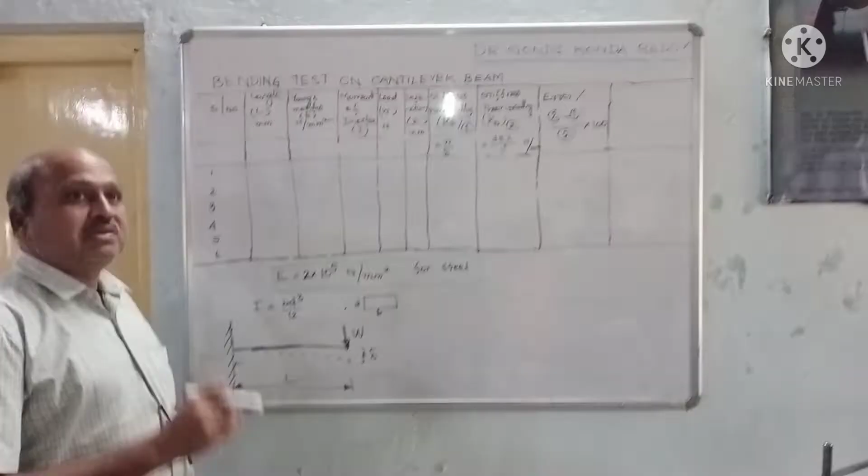Now we are moving to the calculation part, which I am going to explain on the board. I will explain the calculation part of this cantilever beam bending test.

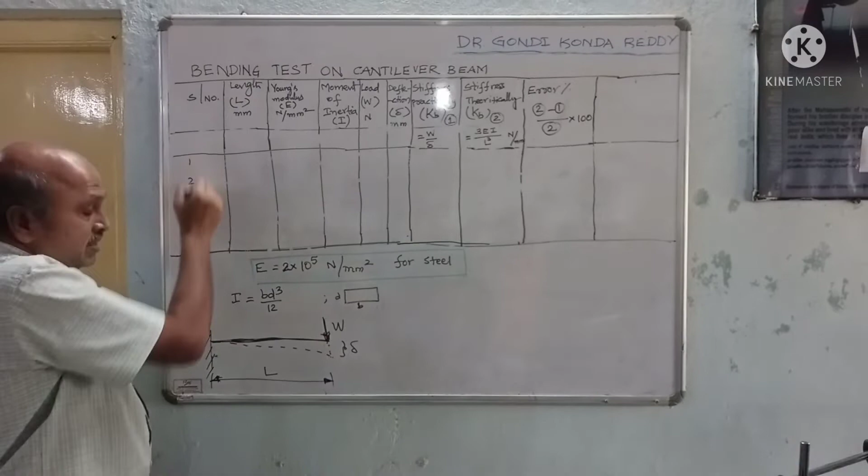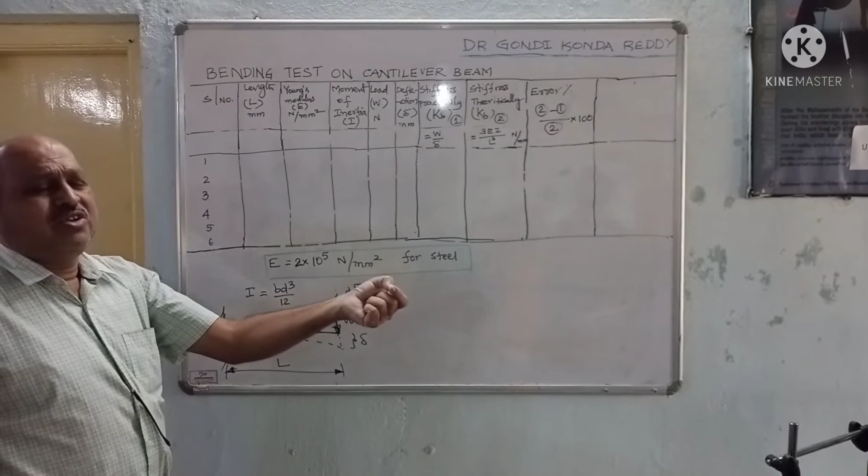These are the tabular columns we are going to follow. The first column is serial number, since we are taking 6 readings, so I am writing 6 serial numbers. Then the length of the beam - the length from the fixed end to the free end where we are applying the loads. You can vary this, or take a fixed value as given data, such as 1000 mm or otherwise 950 mm. Whatever value you take, use that value.

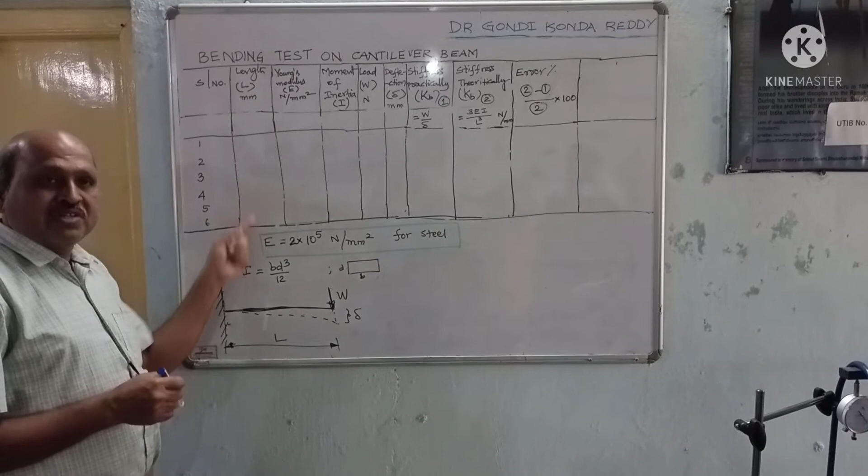It is not going to vary while the experiment is going on. Once it is started, you take all L value same for all the weights. Maybe it is 1000 mm, I am taking.

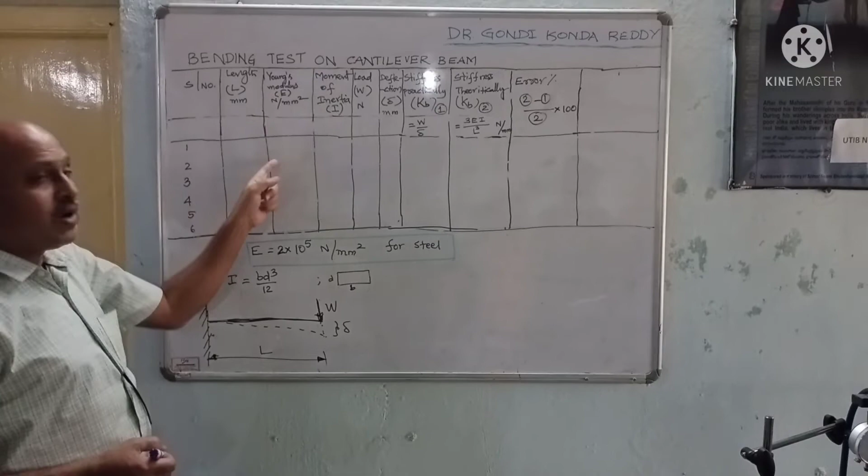Then Young's modulus, I am giving the steel material. The Young's modulus for steel is 2 into 10 to the power of 5 Newton per mm square. Take that value of Young's modulus. It is not going to change since we are using the same material.

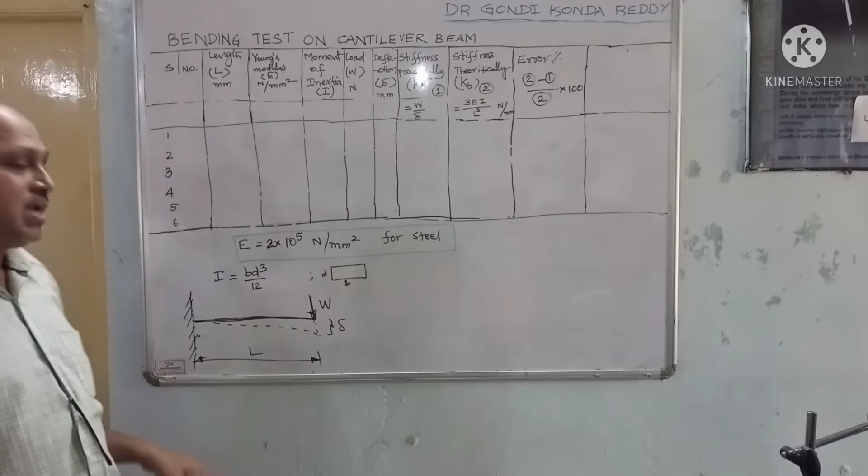Then moment of inertia I. You know it is a rectangular cross section as shown here, breadth is B, depth is D. What is the moment of inertia? We know it, I is equal to BD cube by 12. So B is in mm, D is in mm. What is the value we are getting in units? Mm to the power of 4.

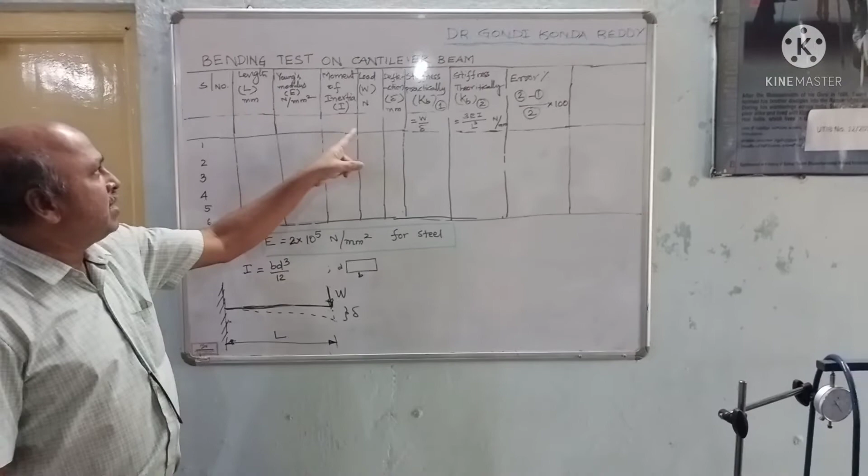So now we write the value of moment of inertia like this. You just measure through vernier caliper, take the values and have the moment of inertia in mm to the power of 4. Then load.

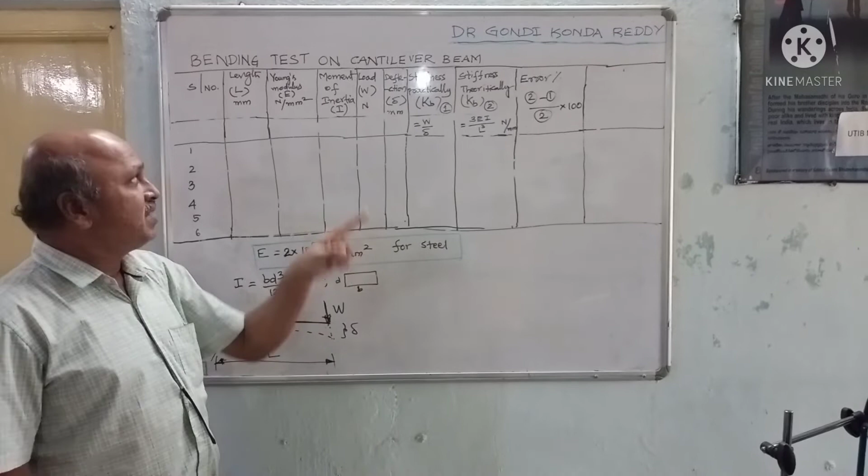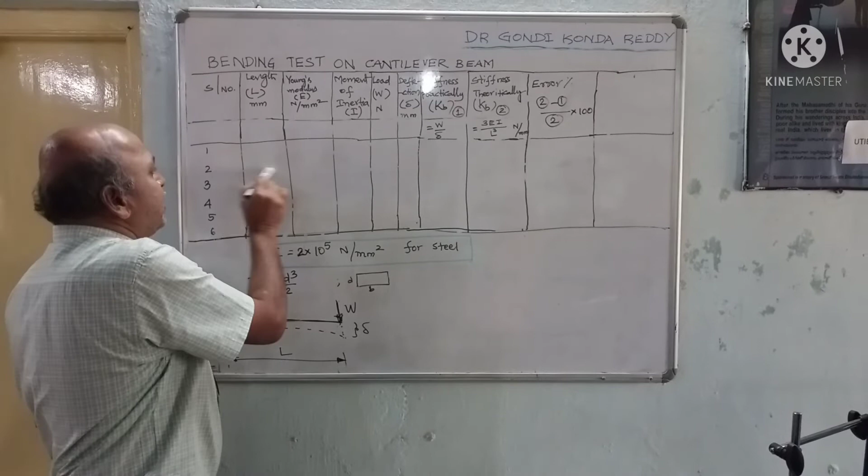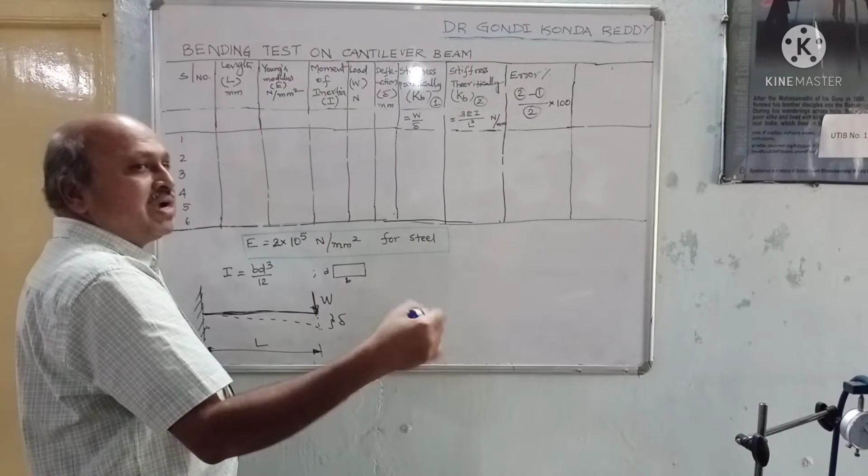Load, as I am saying, the first load you take is 0.75 kg. In terms of load, how much are we getting? 0.75 into 9.81. Second reading you take, add 0.5 kg, then 1.250 kg. In terms of load, multiply by 9.81. Because we are taking load in kg, multiply all the values in kg to newtons by multiplying with 9.81 everywhere. Then you take third reading.

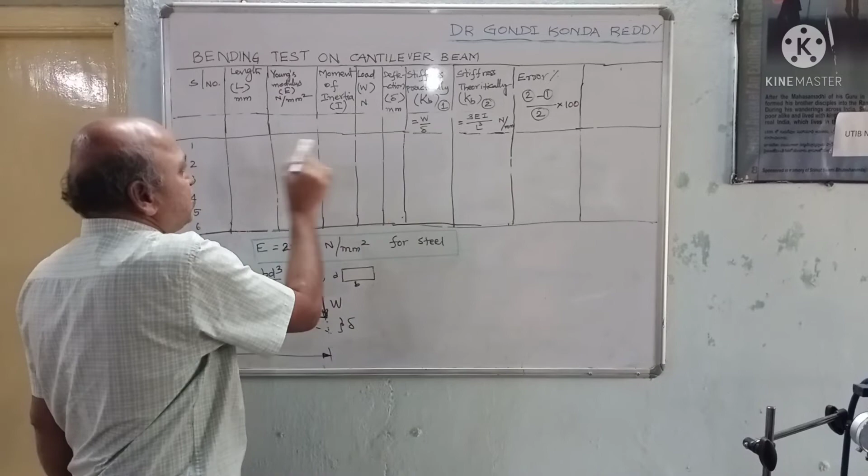For that, what is the deflection we are getting? You have to take it. First value, as we are taking, the weight we are taking is 0.75 kg. In terms of newtons, 0.750 into 9.81. That is in newtons. Then deflection, what is the value that we are getting? You write that.

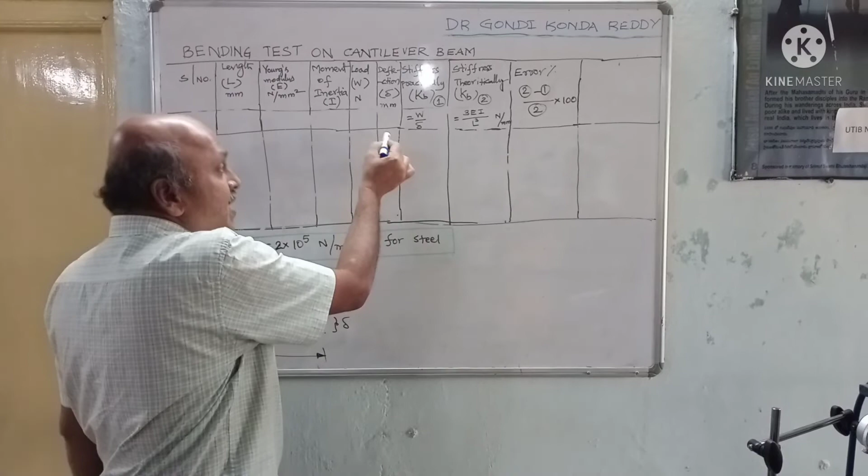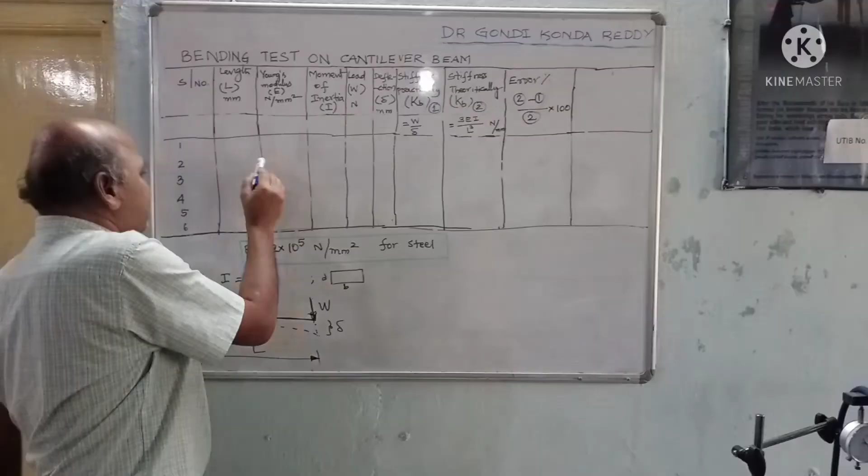Then you take the second value. What is the value? Weight load 1.250. In terms of newtons, 1.250 into 9.81. Likewise, go on adding 0.5 kg like that.

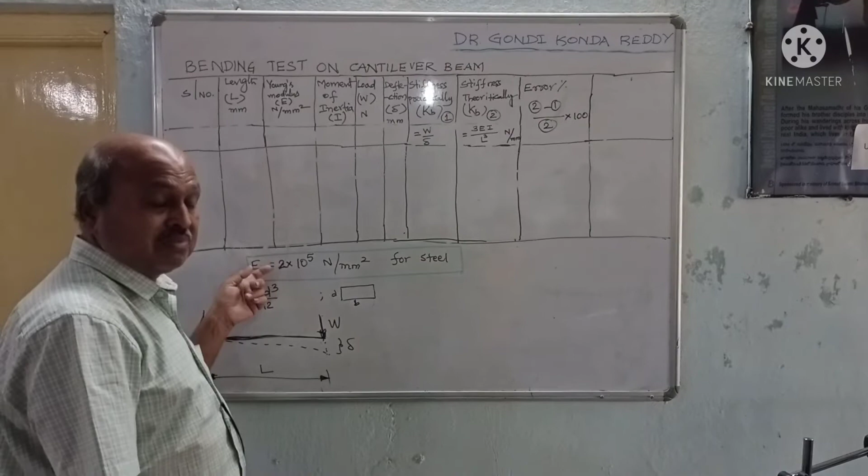Because it is simply a cantilever beam, we are going to have more deflections, so add only 0.5 kg. Don't go for maximum 2 kgs, 3 kgs like this, not 10 kgs. Maximum load is not 10 kgs, you take this to 2 to 3 kgs, 3 kgs is enough. So add every reading 0.5

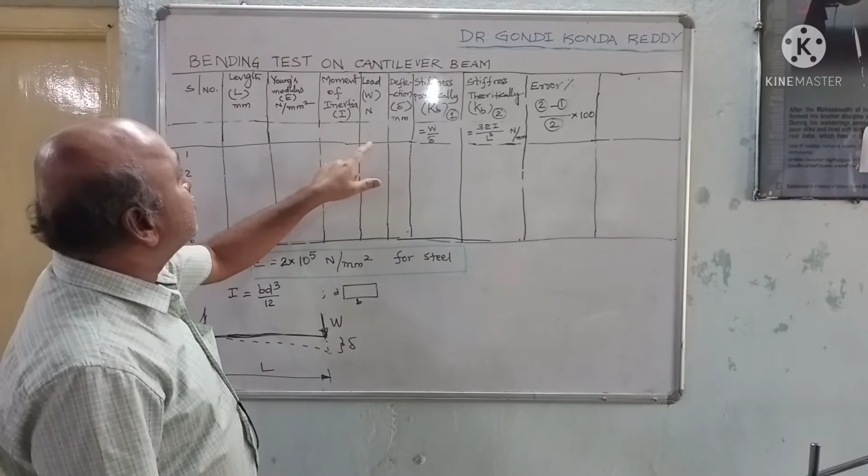kg like that. So for that individual reading, what is the deflection we are getting? You have it. Then stiffness practically.

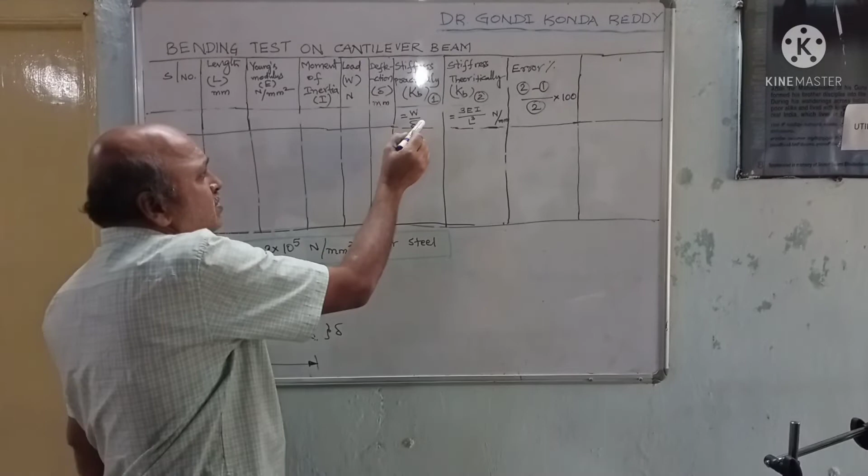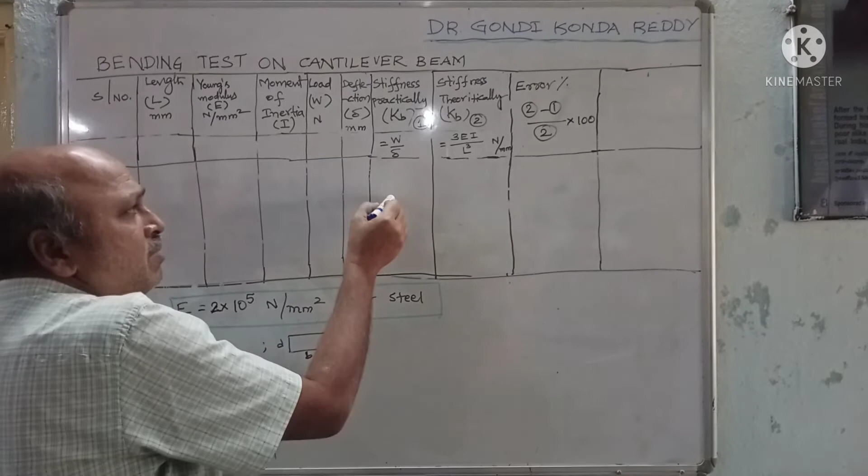We know stiffness practically is W by delta. W we are getting in newtons, delta deflection, whatever value we are getting, W by delta, you take it. W value we know in newtons and delta we know in mm. So the stiffness practically we are getting is newton per mm.

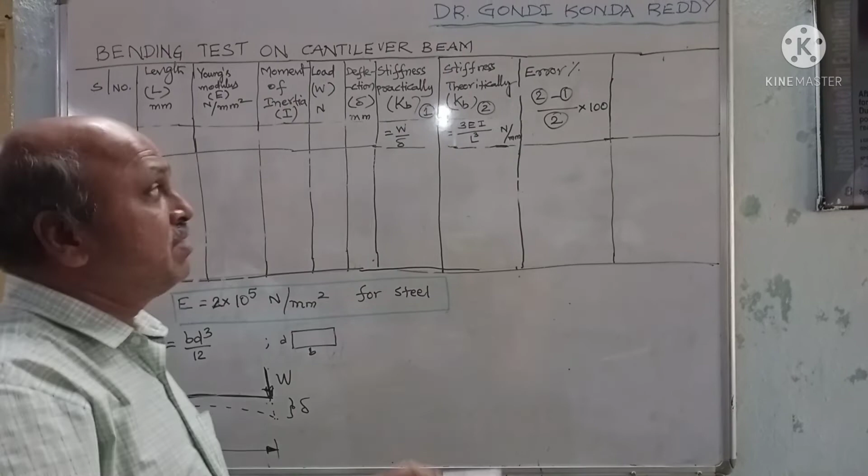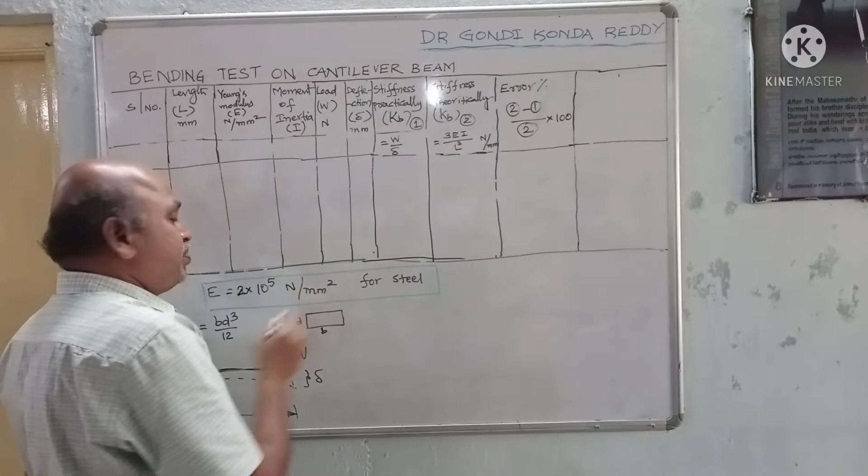So we know theoretically also. Theoretically, stiffness formula is 3EI by L cube for cantilever beam. E is Young's modulus, 2 into 10 to the power of 5 Newton per mm square. I is whatever value we are getting, take that value. By L cube, L is 1000 as I am asking you to take, so 1000 cube.

So this entire value we are getting in Newton per mm. Now we got the stiffness value in terms of Newton per mm, practically and theoretically also we are getting.

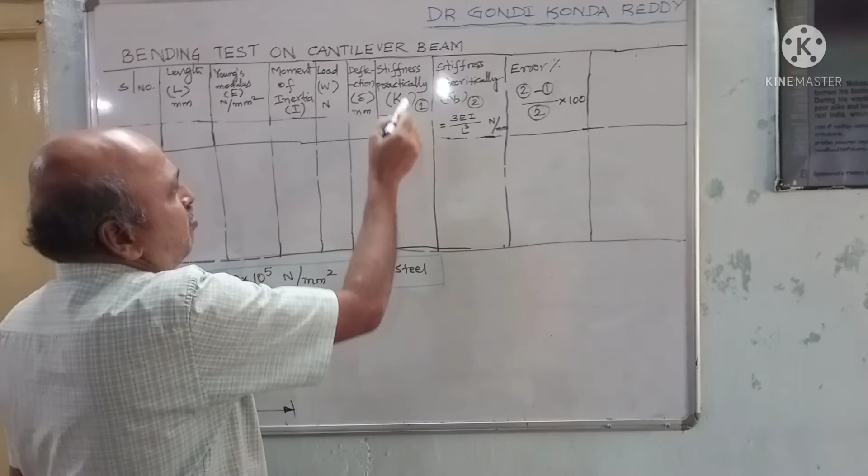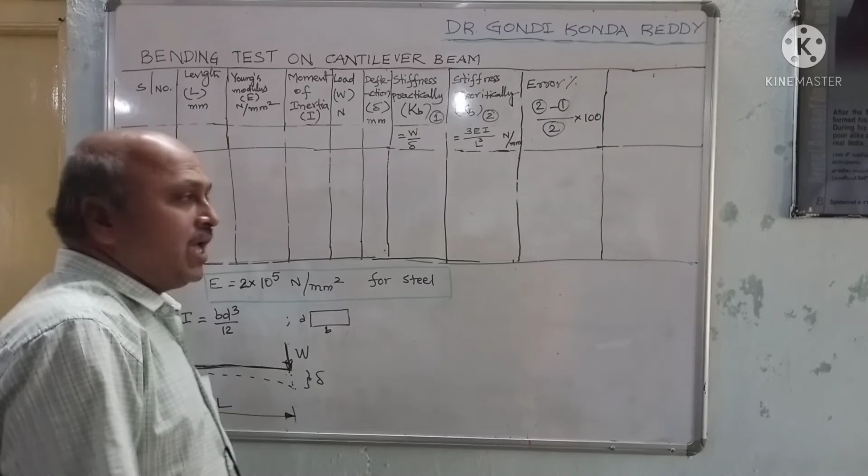Take the error percentage. How do we take it? Theoretical minus practical by theoretical into 100, I want in percentage. Likewise, you take for all 6 readings, then you are getting error percentage. Take the percentage, the average percentage of error, because we are having 6 readings, take the error of 6 reading percentages. So we are getting error percentage.

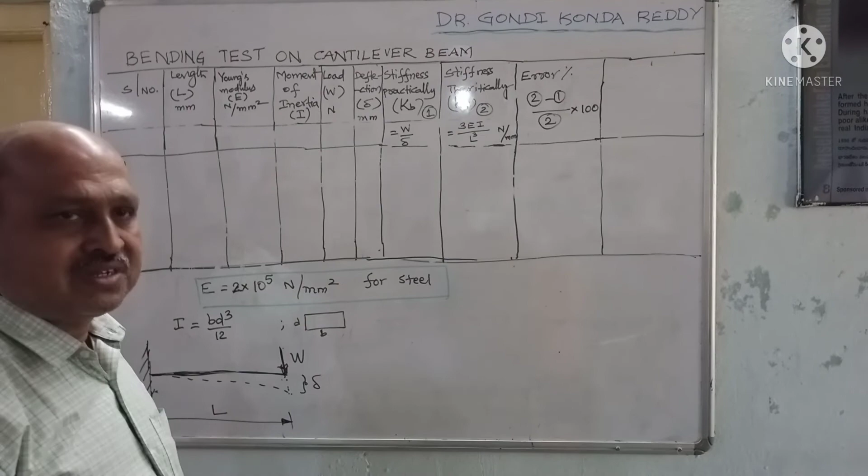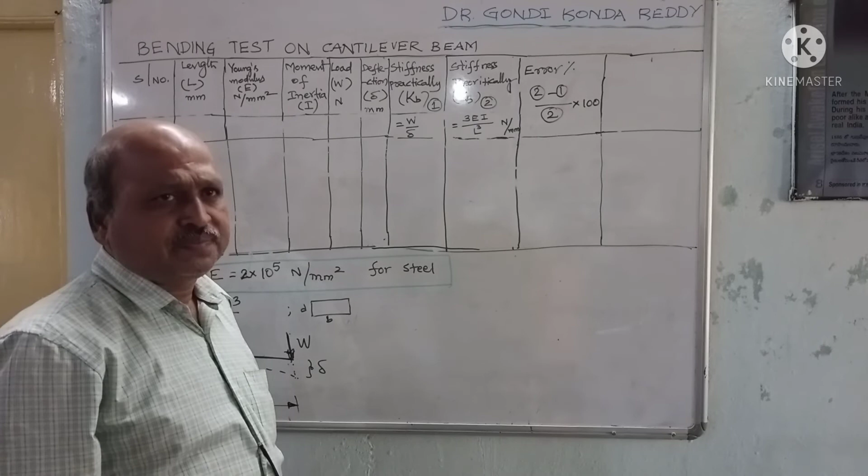So we have to see that we are getting the error percentage as minimum as possible, maybe 5%, 6% like that. This is how we have to do bending test on cantilever. Thank you.